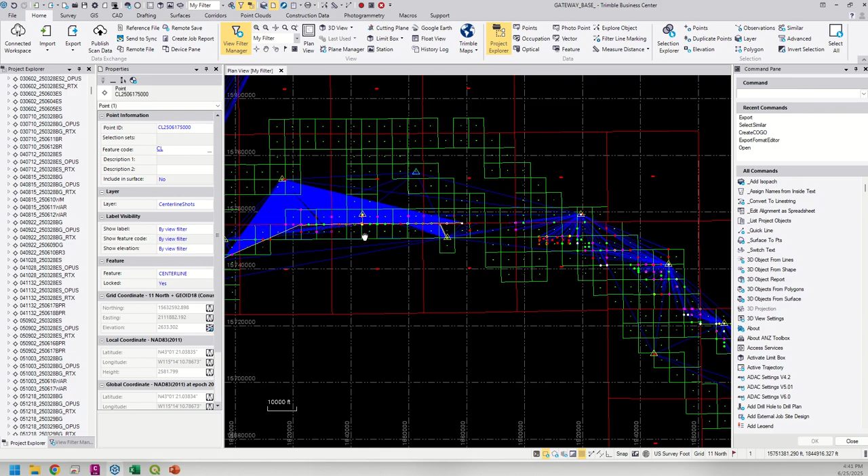These are also verified against OPUS and RTX as a cross-check to ensure that our static network verifies against a repeatable CORS station or static control and RTX real-time network.

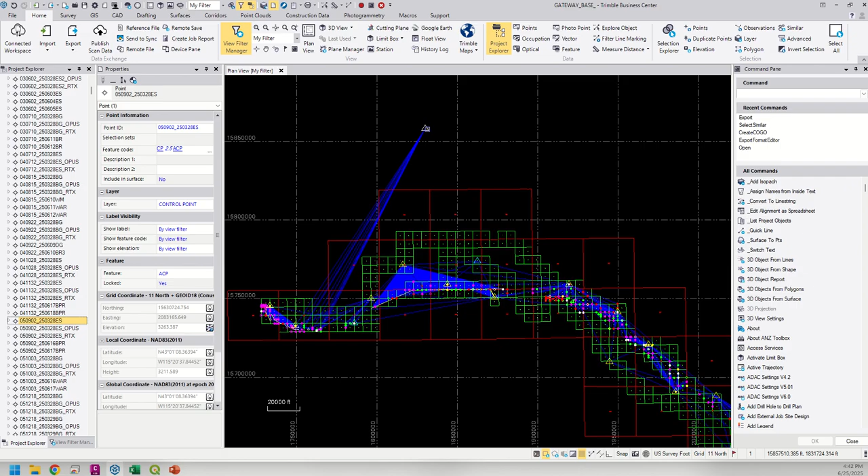That being said, to manage the crews daily, the crews go out and they collect in a point number range that is specific to their crew. It's year, month, day, and then the point range: 500 to 750 belongs to crew 3, 250 to 500 belongs to crew 2, 001 through 250 belongs to crew 1, and crew 4 is 750 to 1000.

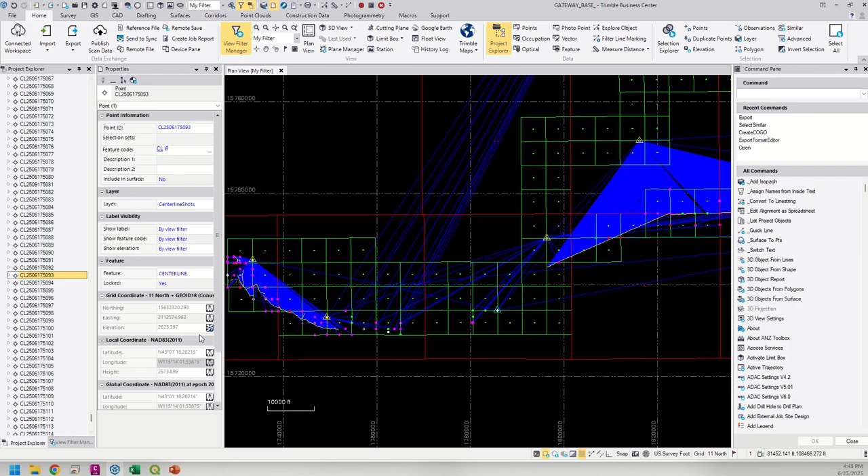If the crews do continuous topo, they collect in the 1000 range for their daily number with a CL in front of their point number range. This is extremely useful to be able to differentiate between centerline shots and regular shots as the crews move through the projects. Every day the crew comes back and they build out a job folder with their initials, so the different crews will continue building out.

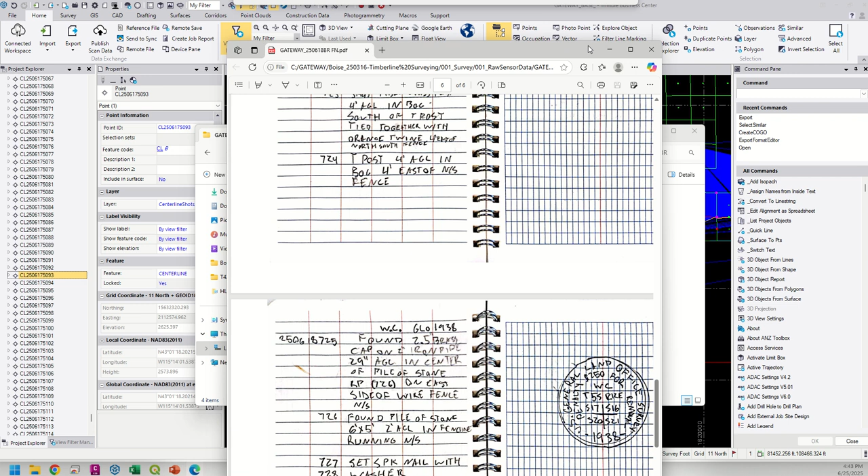They put their photos for the day and their field notes for the day, and they put their job and their base file as they log every day into the files folder. This is automatically created by Trimble. And once that is done, then this data is processed and output from the survey to CAD.

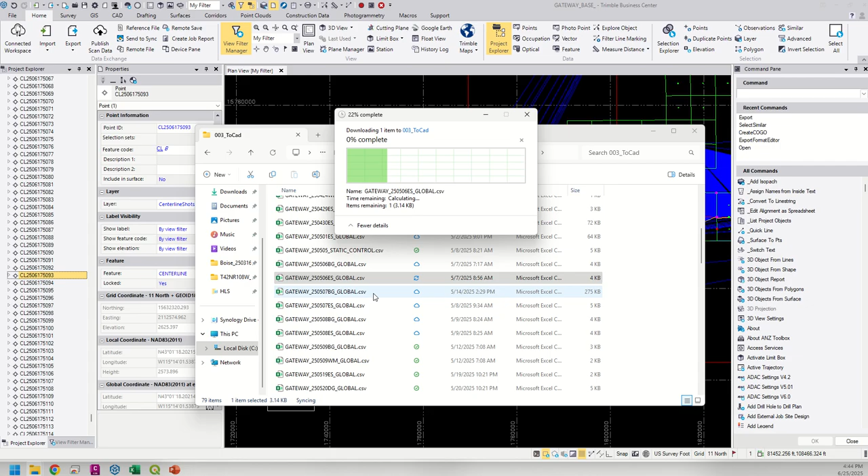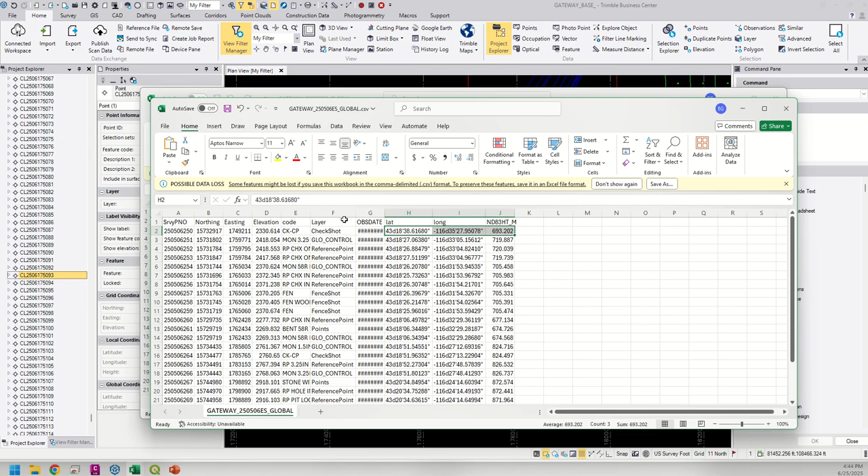This is run similar to how the township, section and range is, that you will have a plat and a field note. So per day you'll have your field notes, and then you'll have your deliverable, which will also have a latitude and longitude from TBC and an ellipsoid height so it can be verified against OPUS. These also have the survey point number, northing, easting, elevation, and code, and then the layer for separating this out in CAD and in QGIS.

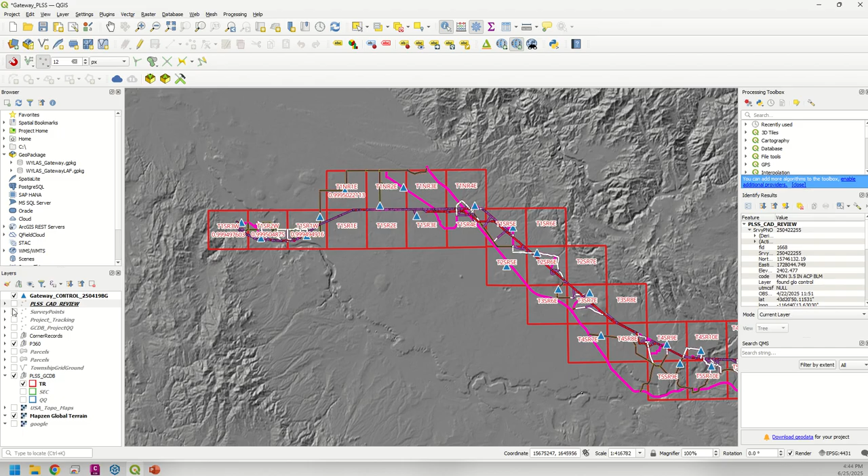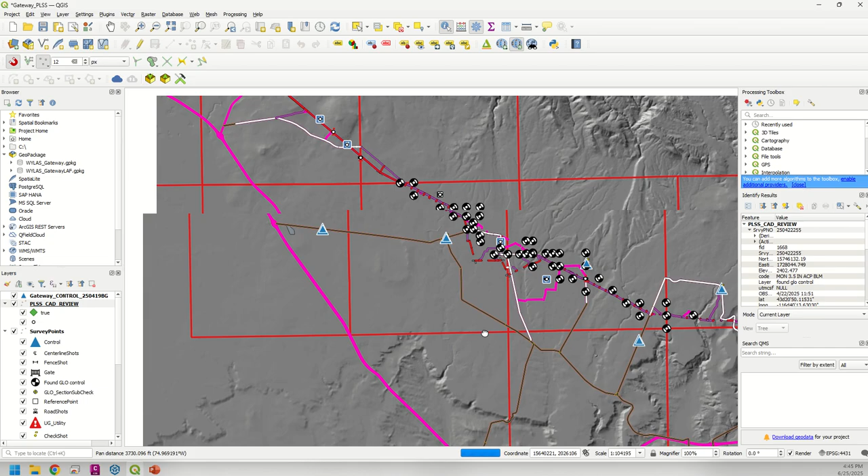QGIS is a very important tool for my survey crews. As the survey data comes in to track their progress across the site, you can easily turn things on and turn things off and verify what points have been shot and what points need verified. So as I go through and verify points and put them into their indexes, in this case, let's go to this index here.

So every day the crews will go out and they have a target, which is my way of verifying what they're working on. I'll give them the GLO information of what to expect at the corner. And then after they've shot it, I put in the information from their field note. This was put into H17 in the township drawing. So when you are coming back for a corner record, you can find it all in one spot.

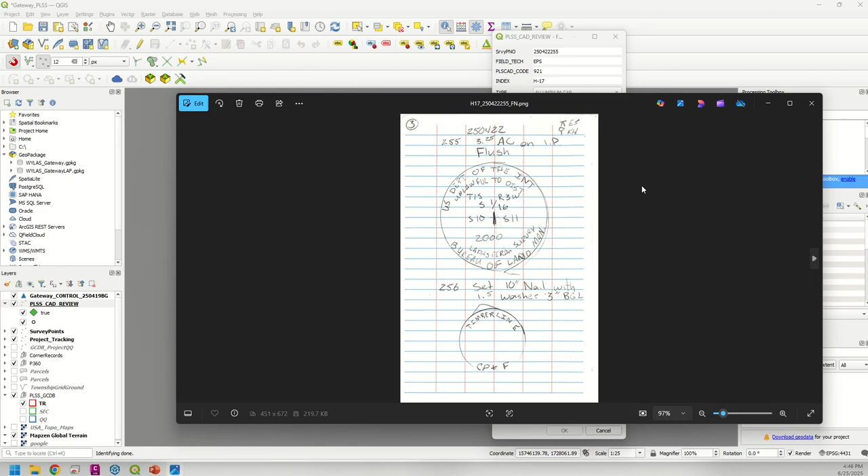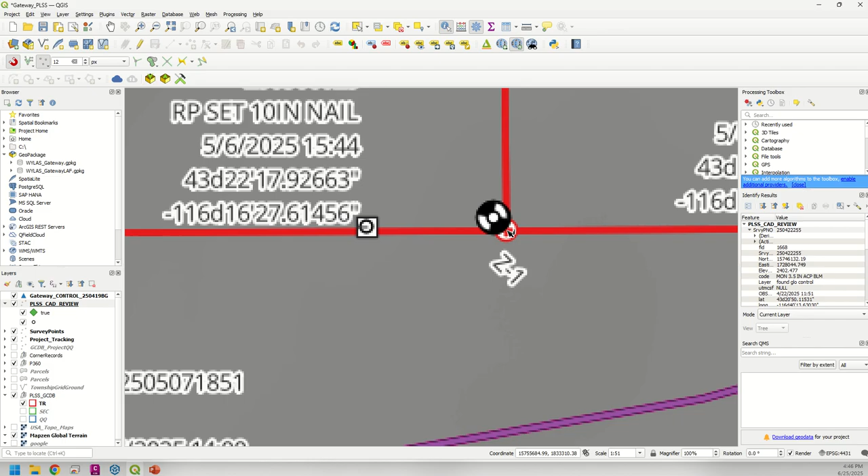Go to the township and then go into your corner record, H17, and get the photo of the cap and the field note from the field crew. This, coupled with the GLO notes, is an extremely valuable corner record making machine. So once you get the hang of everything, then you should be able to get your field descriptions. This is a little forward in the project.

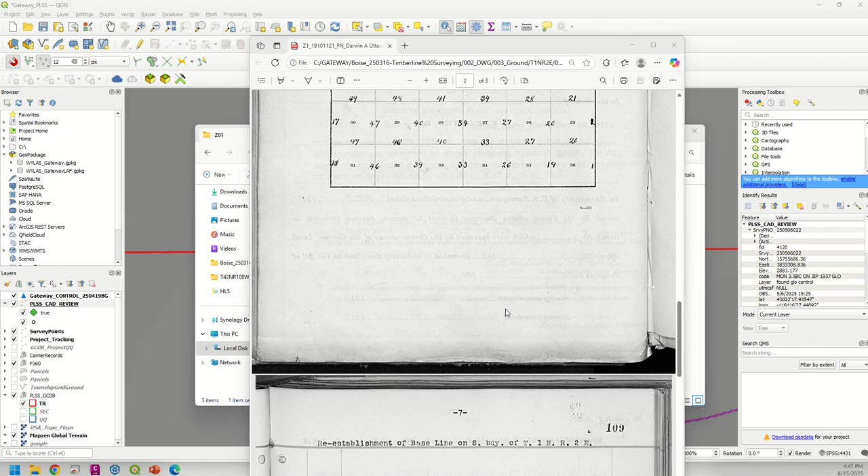I haven't had time to get this, but let's just go through and go to T1 North to see the process. Survey, drawing, 1 North. The corner record, Z1, and we should have the original field note, which should have the index and then the note of what was found. This is just a suggestion on how to store your field data.

But as things are progressing through the project, a live layer in QGIS can be output to QField, which is compatible with iOS and run from a phone. It is also compatible with Android, which is my preferred way of using it. This is also compatible with Civil 3D.

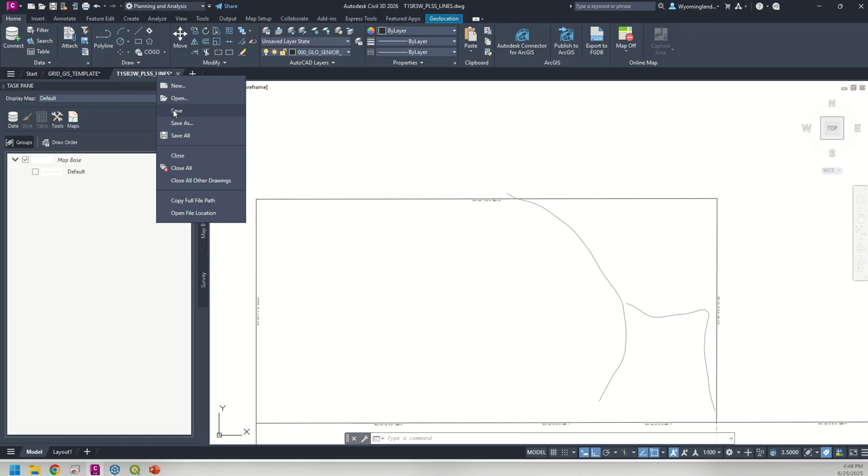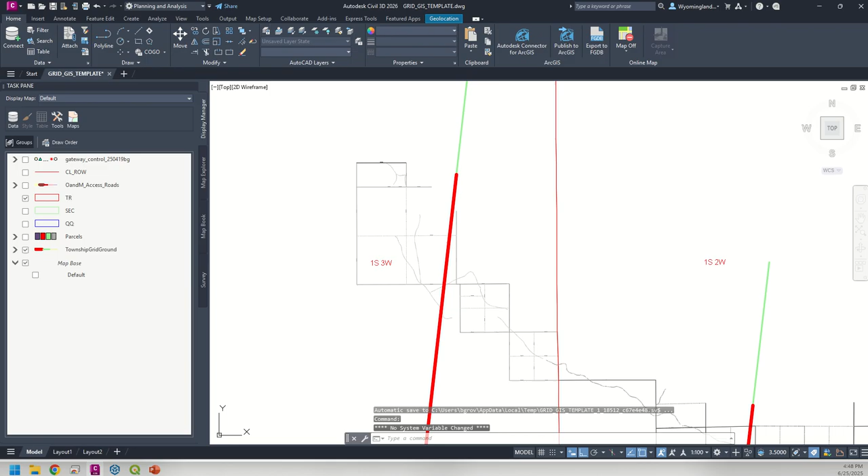So when you are doing standard review on a township, you can do all of your verification and line work for your proportions off of the GLO in Civil 3D, and when you verify, you can verify against your field notes, which is the same as QGIS. I make a township and grid line that scales from 0,0 so that all of my grid data is far away from my ground data.

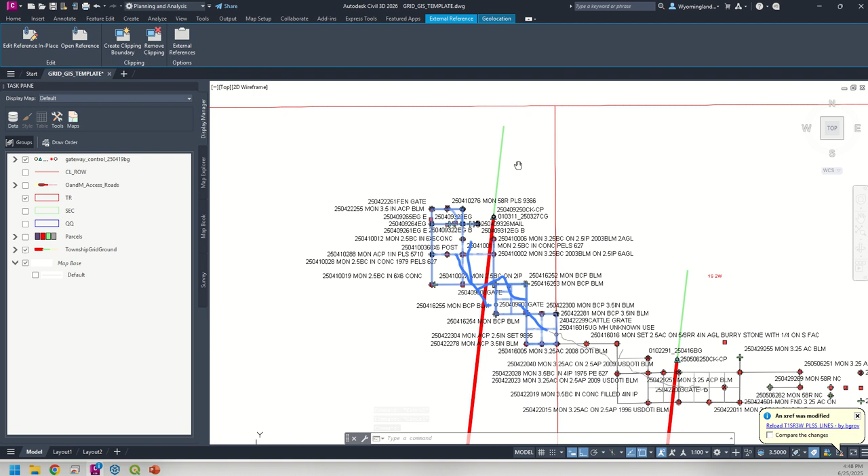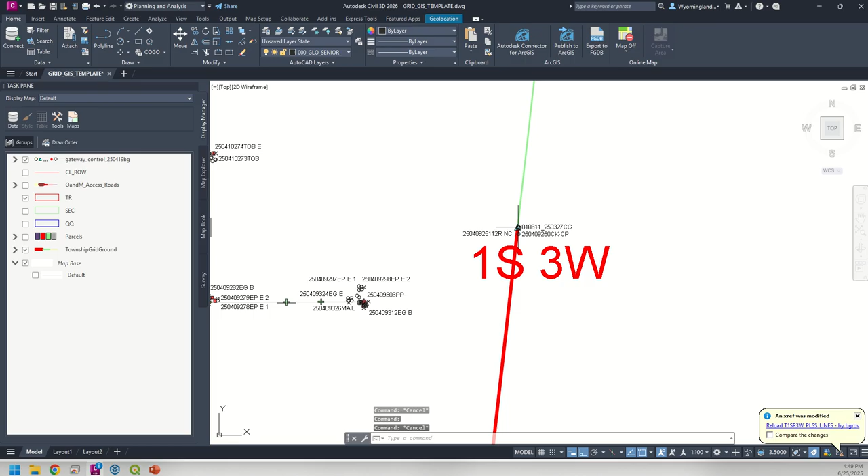For example, in order to have this line be at ground, currently it's at grid. You can see the grid distance is saved into my W block at 2657.42. So that's the difference between grid and ground at this site location based on my control point, each control point being centered in the township and used for scaling zones of these townships so that the error toward the edges of the townships doesn't become unmanageable.

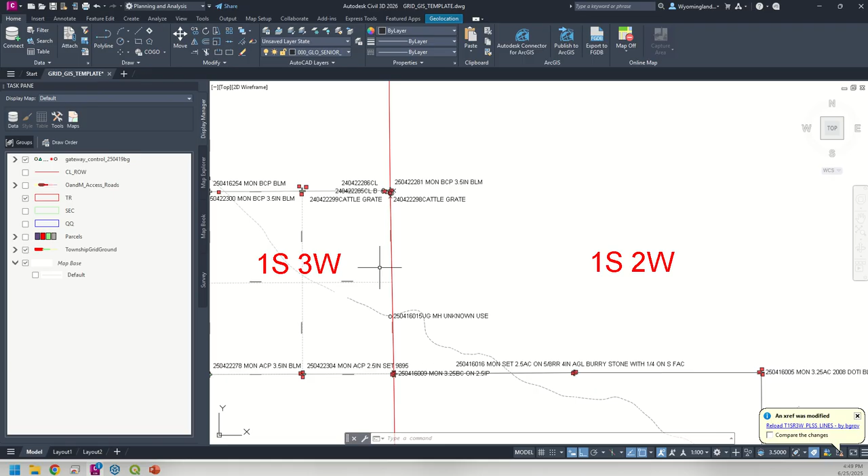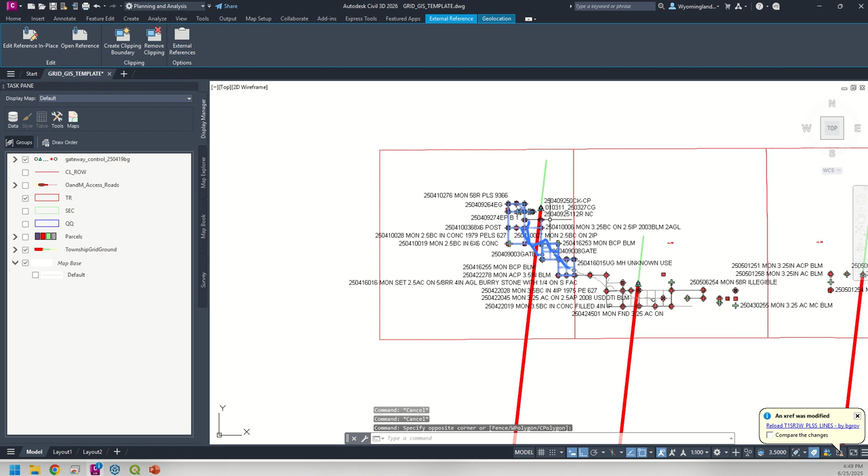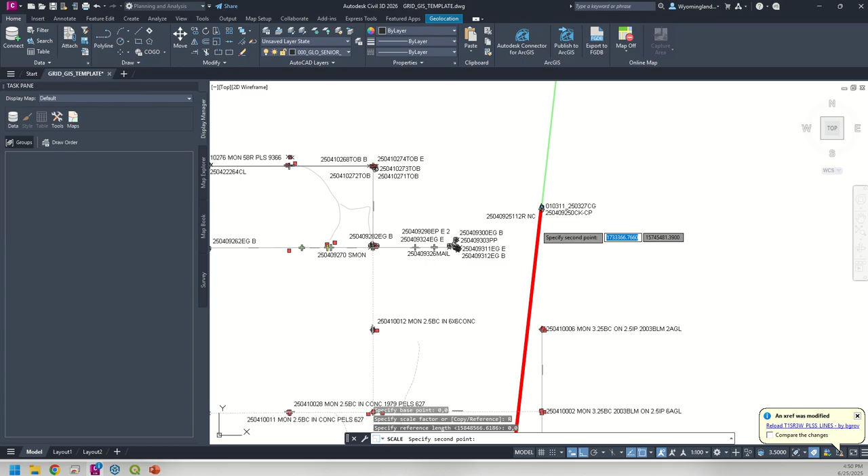This ensures that all of your line work lines up because you're starting from a line from monument to monument and finishing from monument to monument. It is a simple scale, so you scale from 0,0. You're doing a reference scale from 0,0. And in this case, we are at grid, and we're going to ground.

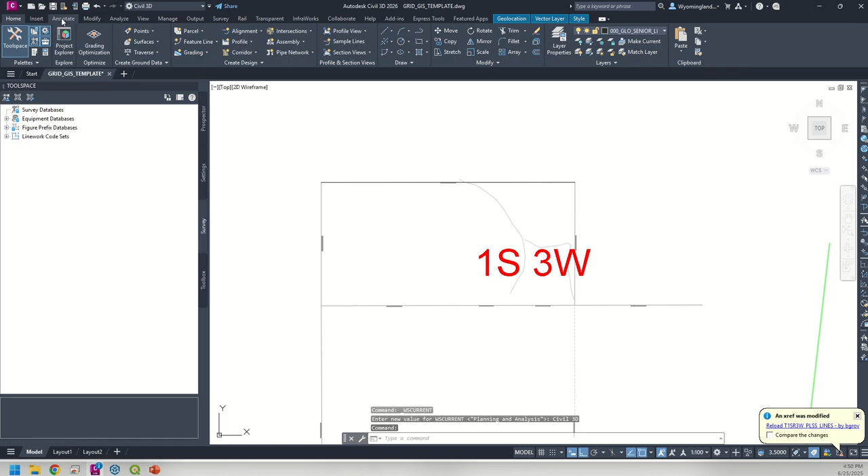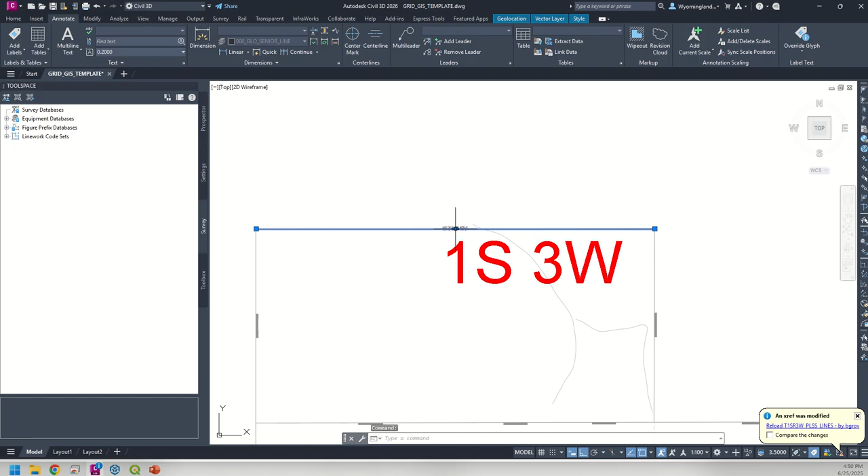Now, you can turn off your survey points and you can see 2656 was our old distance. 2657.42 is our new distance, and obviously I must have not snapped that right. There you go. That is how to draft at grid and ground and manage like Thomas Jefferson did.